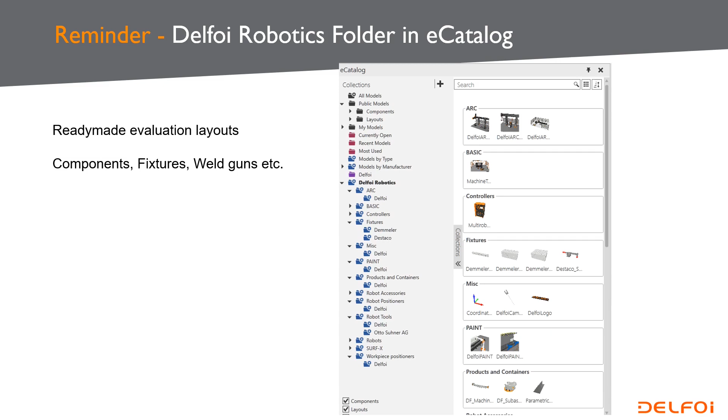Okay, but let's move on to Delfoi Robotics 4.5 release and its new features and functionalities. So first up is the localization feature, meaning that we now support languages that the Visual Components platform also supports. So it's English, French, German, Japanese, Korean, Spanish, Chinese and traditional Chinese. To change the language in the software, just go to File, Options and General, and then you can choose any language, restart the software, and the new language is set up.

Then the next new feature is a statement search functionality that allows you to search statements by name or description, but you will see a live video of how this really works. And then a new feature called undo redo. We have had lots of requests for this feature, and now we did it, and you can find it under the path setup panel. So there are undo and redo buttons over there, and basically you can undo and redo any action you take on the path setup panel, and you will see a live video of this in action.

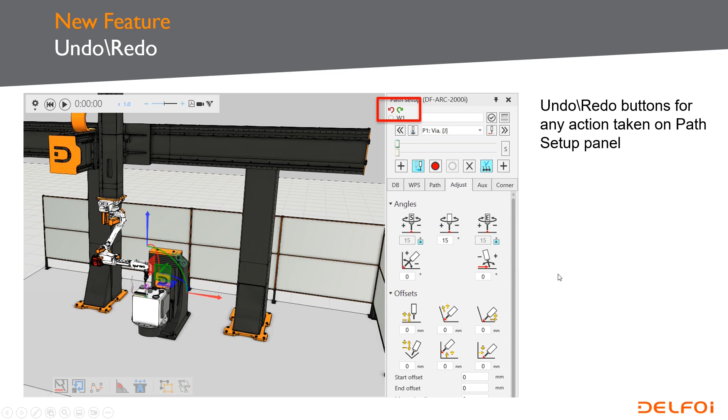Then a new feature, maybe the biggest feature in the 4.5 release, is called Program Validation Tool. You can find it from add-ons, Program Validation button, and basically it looks the same as the path check tool you have maybe previously used, but now this is a much more advanced tool. It allows you to check basically anything you would typically do with the simulation. So it's kind of a background simulation done really fast, and it can handle basically any scenario, any layout type, including multi-robot layouts. And you will see a live video about this one too.

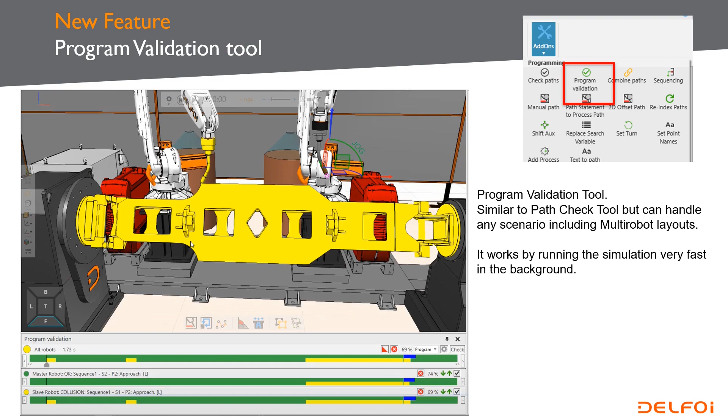Okay, so next up is my colleague Severi, who will show you live how those new features work. Hi all, Severi here. Now let's take a look at some of the new tools and features that we have added for the 4.5 release that will help you with your programming.

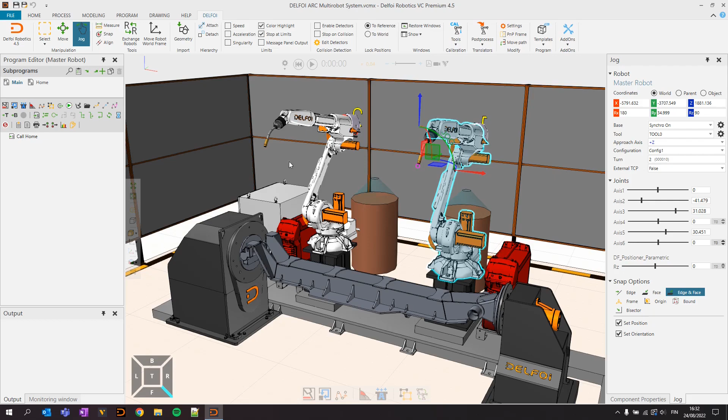Here we have a quite simple multi-robot layout where we have 2 welding robots and 1 workpiece positioner that act synchronously with the robots. The one on the right is the master and the one on the left is the slave robot. Now let's create a simple program for this and then see what our new tools will do in this situation. So first let's create a simple program for the master robot. Let's create a new sequence over here and start to do some welds on the workpiece. First, let's do a weld here on the bottom side of the workpiece. And for the start point, let's also do an auto search.

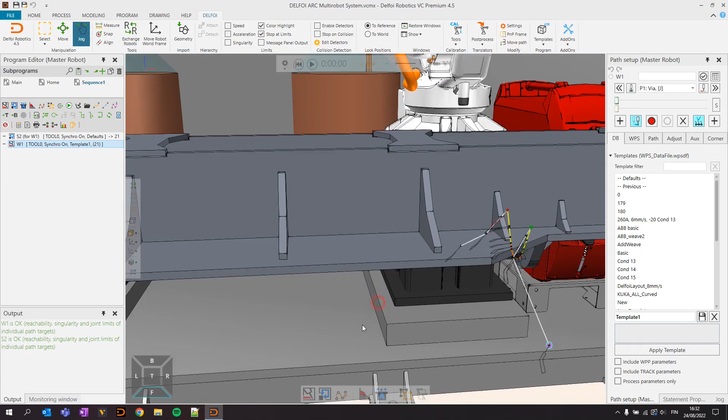Let's also do one weld here on the other side, somewhere over there, for example. And let's also do a start point search with auto search for that one. Okay, now we have 4 statements for our first robot, and the first feature I want to demonstrate to you is the ability now to search for statements inside the program editor.

So now these first 2 statements are here on the bottom side of the workpiece, so let's rename them both to be at the bottom. So we're just going to type in bottom at the name field of that statement, and then the next 2 we will write as top, so that they are at the top side of the workpiece, like this.

Now we also have this statement search panel available at the top side of the program editor. Here we can open up the statement search on the right hand side, and here if we type in bottom, we can look for all of the statements that have the name bottom over here. We can also search for top, which will find all of the ones that have the name, or we can also search according to the identifier, which in this case for the first weld is W1.

Note that it will also find the search that is now linked to weld 1 by the auto search automatically. So you can search for both of these statements automatically. You can also search for other statements. So for example, already in this layout we had a home point recorded. So if I write over here home, we can also see the home position easily, and also the program calls that call for the home program.

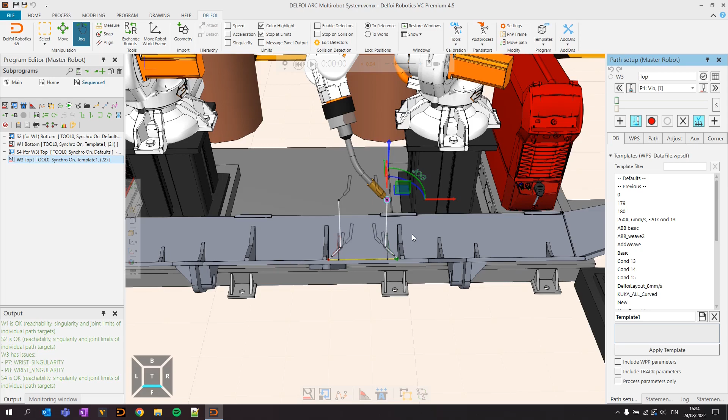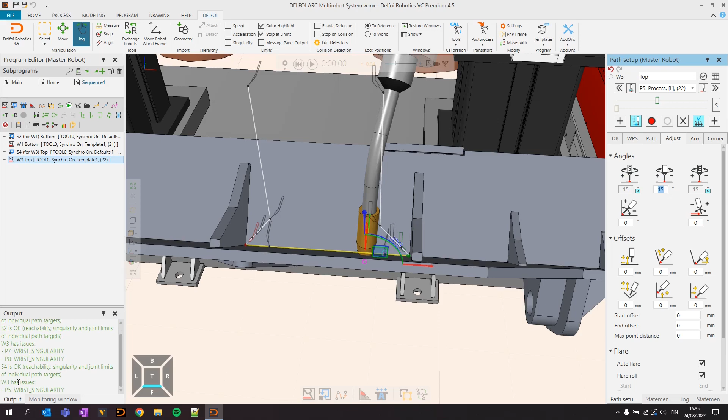The second new thing I want to highlight is that we now have the ability to do undo and redo actions when we modify these statements. So now, for example, if we go to a specific point in the weld and we do some changes, for example on the wire roll, now we can see that our statement has issues right after we have done some modifications. We have a singularity issue after we rotated it 15 degrees.

Now we can also see that on the top side of the path setup panel, the undo button is now available, so we can cancel the last action that we did, and clicking that, it will cancel the recent action that you have done for the path. After doing one undo, it now allows you to also do the redo action, so it reverses the last undo action. And as many of these changes as you do, you can then undo and redo them all if necessary.

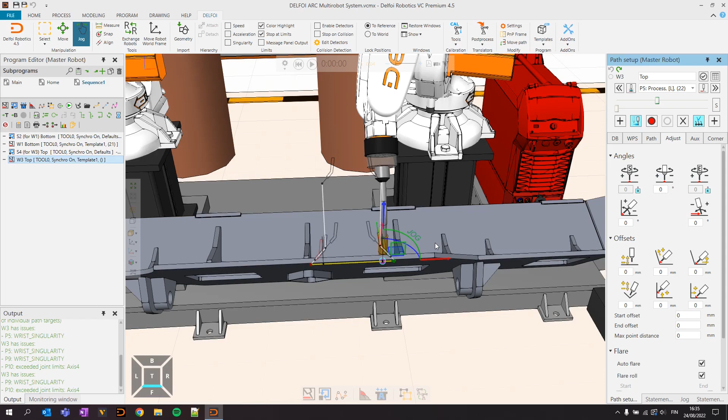So this will also help you with the management of your statements. If you do some irreversible change into your statement, you can now also undo it or redo it if you see that it was better. Now let's also take a look at the multi-robot programming.

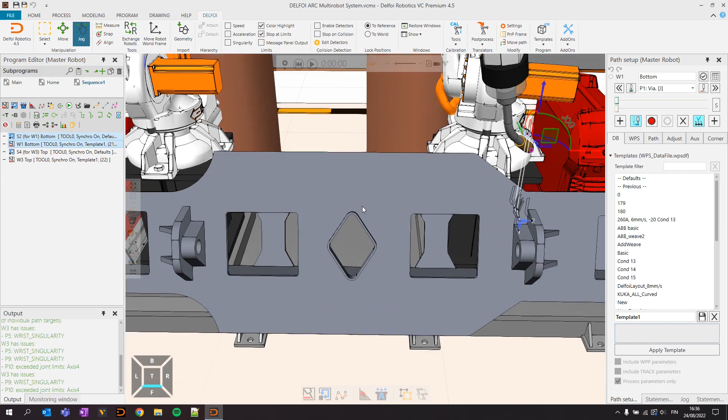So now let's go to the slave robot and utilize those statements that we did for the master. So let's also create a sequence 1 over here. Let's select the master robot and the first 2 statements. Now over here we will select the first 2 from this position, and we're going to use the clone tool to mirror those statements so we can put them here on the left hand side into the similar feature that we have for the slave robot.

Now we're going to also select the move path option. So we're going to select the target sequence to be the sequence 1 we just created. Component will be default, it is the same one where we created these. Target robot will now be the slave. Let's refresh that to sequence 1. And the base and tools, they will be at default.

So now we're going to apply. And now all of these same statements will end up for the slave robot in this position. Also, let's do this for the last two. Let's move this one out of the way for now.

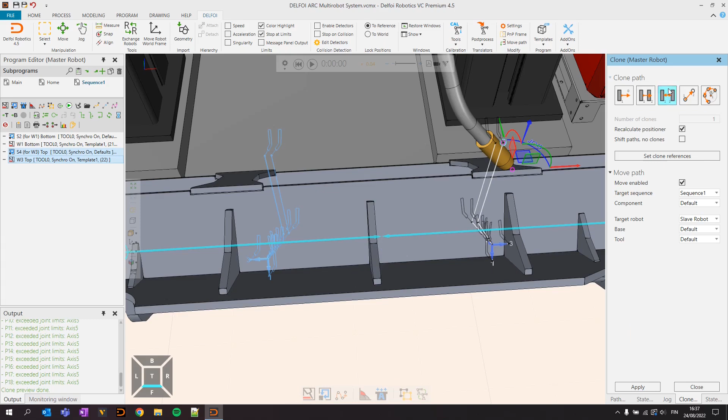Again, same settings, mirror clone, set the planes for the clone, see the preview that is okay. We're going to use the same options for the move and apply. And now also here on the slave robot we have the same program.

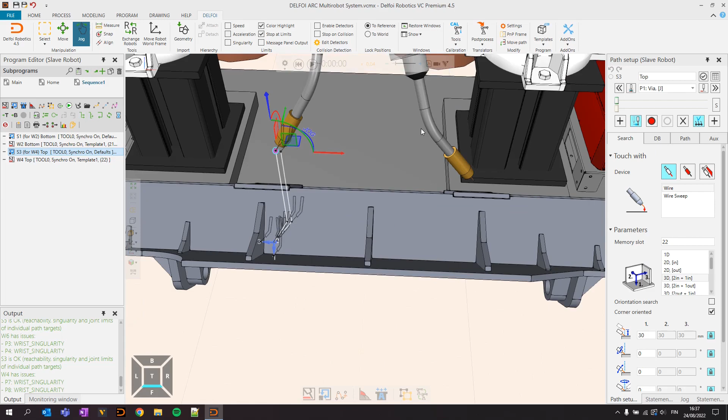Now the last thing for us to do is to get the statements synchronized between the robots. So we're going to go to our search statement, and to do that we need to go to the path tab and set the sync status for each of these statements. We're going to set for the master robot all statements the sync to be master. We're going to leave the positioner robot empty because our other robot, the slave robot, is now not a positioner, it is a welding robot. So we're going to keep this empty for now.

These options under the path tab are available if you have the multi-robot option in your license. And to create synchronous, fully synchronized movement like this in Delfoi, you would need the multi-robot license to make it work.

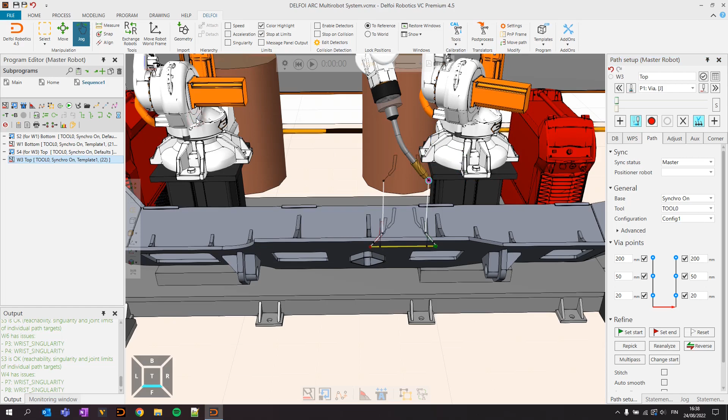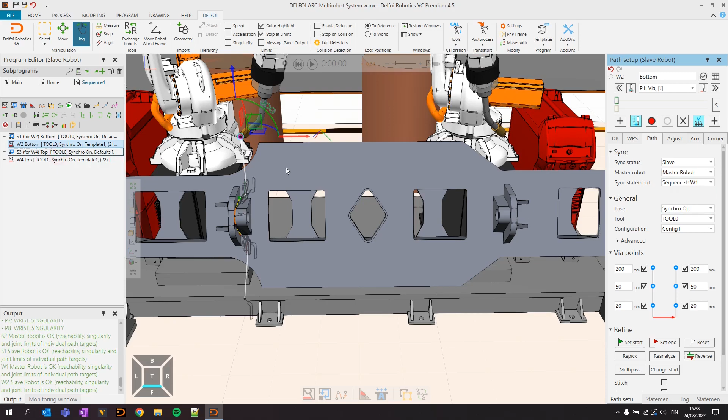Then for the slave, it is more or less the same. We're just going to select slave robot to be the sync status, master robot will be the master, and then we're going to select for the first search also from the master robot. Then we're going to continue this for all of these other statements also: slave, master, weld 1. Now for the second search is the same - we are slave, master is the master, and in this case it will show you an error if you choose wrongly. So we're going to select the second search in the master robot. There is basically no way you're going to do errors in this case.

Again to the path, finalize the settings, and now we have our program synced and created. So we're gonna call our sequence 1, both on the slave and on the master, like this.

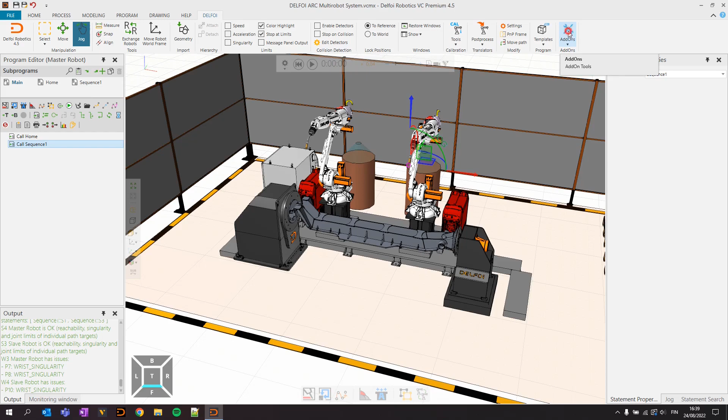And now we can show you the final new tool that we have added, which we can find here from the add-ons right next to check paths. It is the program validation. So the program validation tool will check now for the program that we have created for all of the robots and all of the components involved.

Like with path check, we can also check for the entire program, just one sequence, or selected statements. And then of course we can select whether we want to check for joint limits, singularities and or collisions. And also now we have the option to select a maximum iteration step for the TCP while we run our program in the background. All the other options are the same as with the path check panel.

Now we're going to check our entire program, so we're going to click on check, and what this will do is run the program in the background according to the TCP iteration step that we have allowed, and then it will check the entire program for collisions, reachability, singularities and so on. And after we have checked the entire program, we can then see the results in our program validation window like this.

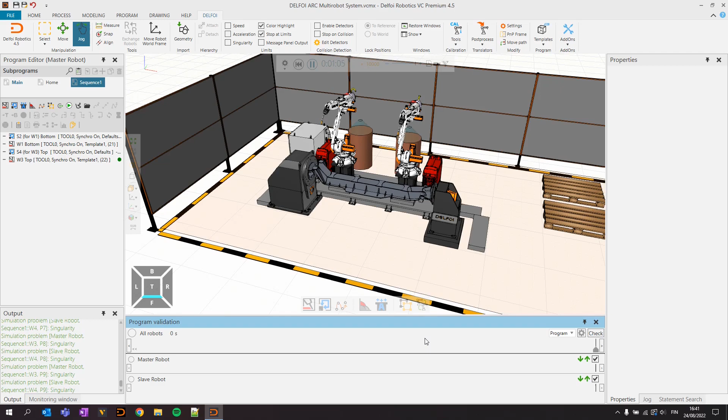Now over here we can see where the problems happen. So as with path check, the green color indicates that everything is okay. On the top in all robots you can see the slider, which will then interpolate the program step by step, showing you the time where the problems happen. And like previously, you can click on the color where you can go to the first problem point.

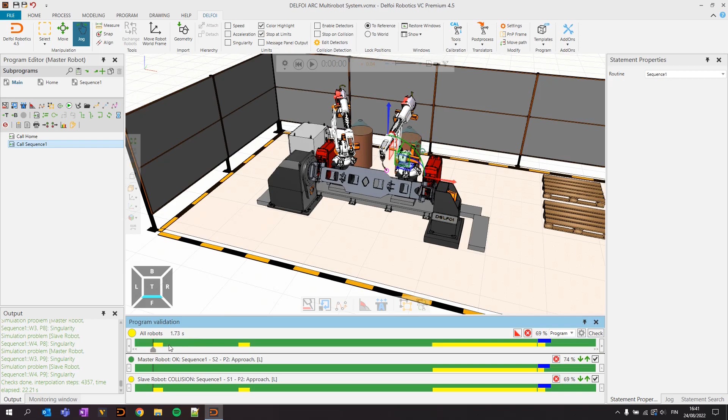So here we have a collision right over there with the slave robot and the workpiece. And now we can see also indicated here on the master robot side that the master robot program is okay so far. So now the approach movement for the slave robot would need some fixes, and like previously, when we go here into the problem point and we click on the statement where we have this collision, it will bring us right to the correct path setup panel of that respective statement.

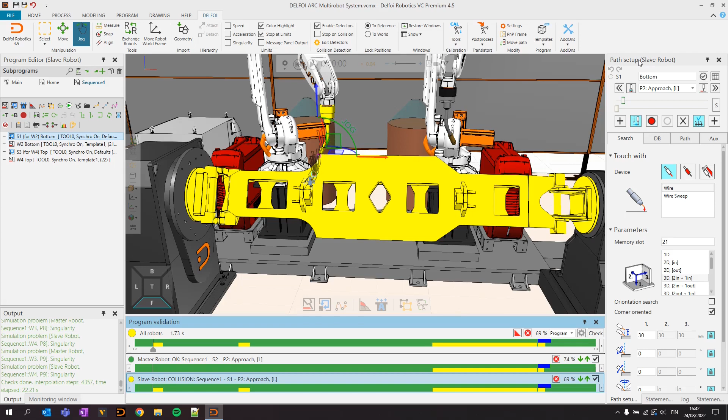Then we can also go forward to see how the program looks and how it interpolates, and we can also see the full synchronized movement of all of the components that are taking part in the simulation.

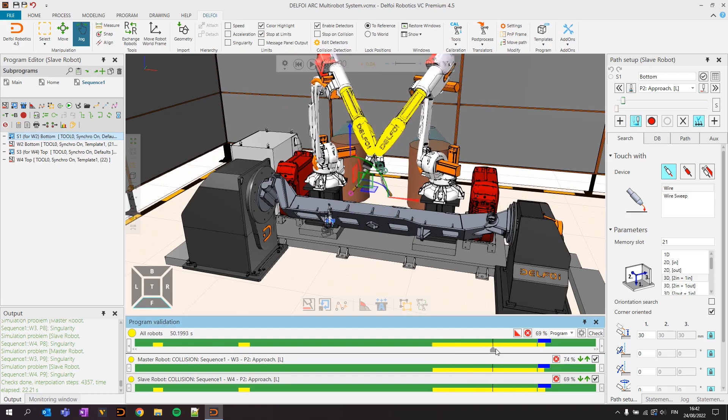And there we can also see highlighted what are the problems we might have. So we have a collision now between the robots, and at the end we also have some issues with singularities when we approach the endpoints of these welds.

Now after checking this path, we can be sure that this robot program is something that we cannot translate to the actual robot controller. There are quite a lot of issues that we need to fix, but this is a clear demonstration of what you can do with the program validation tool, and how you can easily check what is actually happening with multiple robots in our layout, how to check for those issues, and how to fix them also.

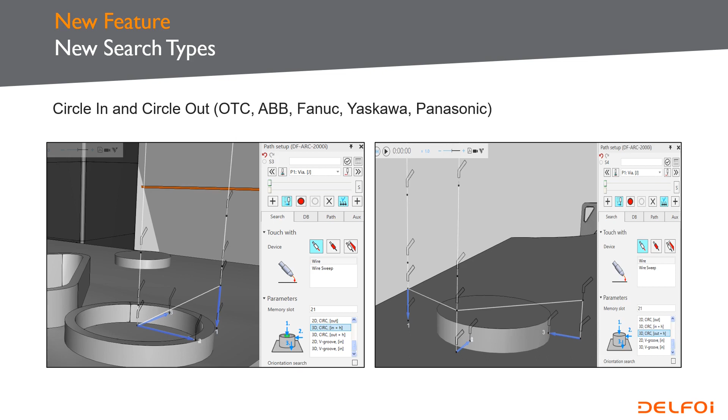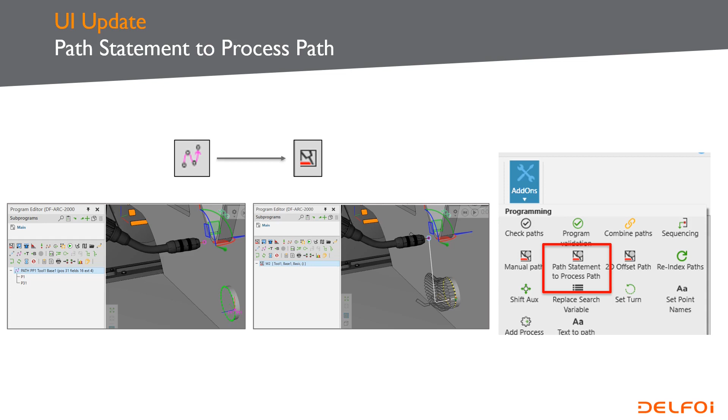And then we have a small user interface update to make it easier to control how the path statement from Visual Components can be converted to Delfoi process path. You will also see a live video about how this new user interface works.

Then an exciting new feature: a 2D DXF drawing imported to Delfoi and converted to a Delfoi process path, called DXF to path. You can find it now in the 4.5 release from templates, the DXF to path button over there.

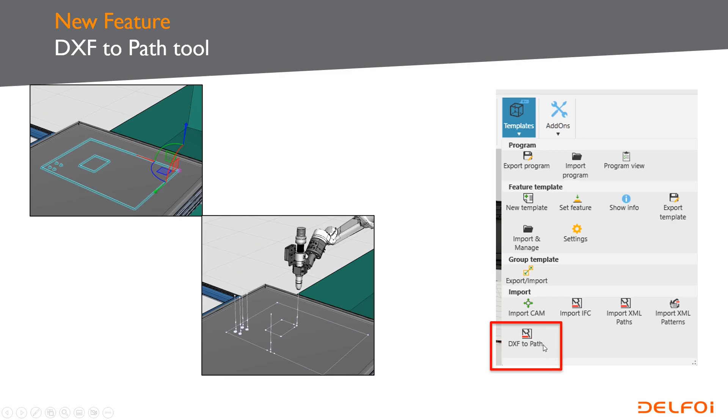And next up is my colleague Vidisha, who will show you live how these new features work.

Hello all, Vidisha here. Let's now have a look at another set of tools for the 4.5 release. We now support circular searches for ABB, Yaskawa, Fanuc, OTC and Panasonic robot brands, and we will have a look in this layout at how to generate those circular searches.

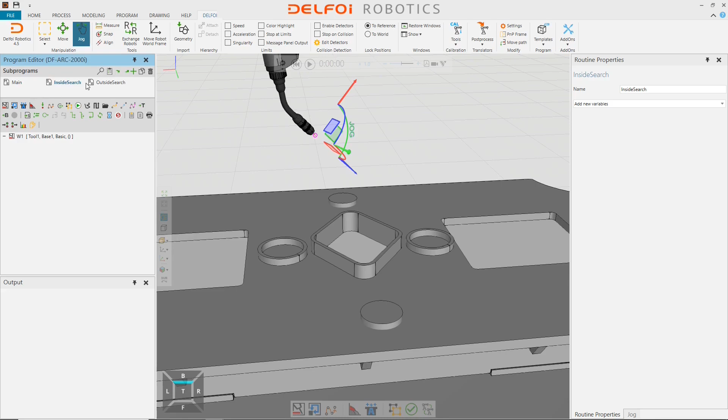I have already created two separate subroutines for inside search and outside search. In this inside search, there is this circular seam already generated using the create path tool. Now we will move ahead and use the create search tool.

After this, we go to the search mode and choose the 3D circ, or 3D circular inside search, option. When I click on that, you will also see a preview of how you need to pick the touch points on the CAD file. You can also see the notifications inside the output tab.

So let's go closer and pick the first search surface as the inside of the circle, then pick the outside surface, and then the third surface would be the top surface where the seam is located here. Once you do that, you will see that this robot motion to calculate the circular searches is now generated.

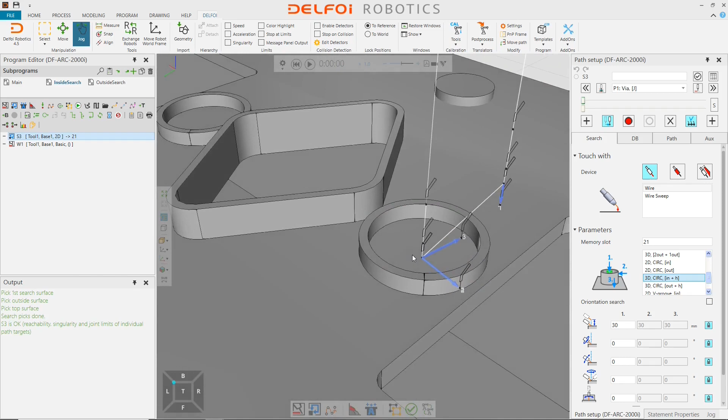This has a little bit different way of tweaking these points that you have generated. For instance, in this case, you would like to have these points touching a little bit on the top surface of this circle, and in order to do that you have this drive distance.

So you can use this first block from here, the drive distance block, and when I change the length from here, you can see that the position on the vertical surface where these touch points are, I'm able to change that. Secondly, you can also change these point locations radially using the twist angle. When I change these parameters in the first block over here, you are able to change the locations of these points radially.

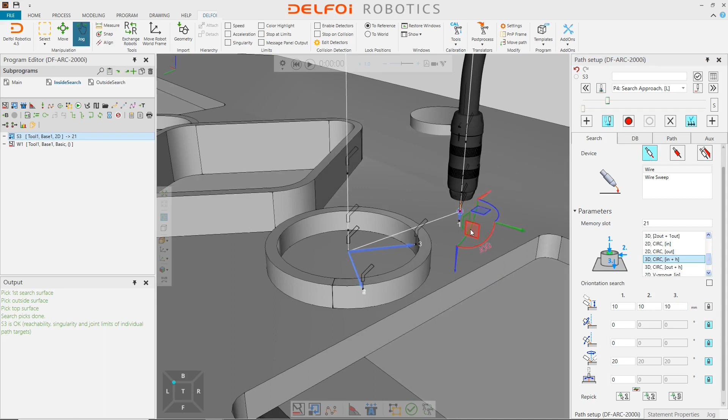Another important thing is for this first touch point, for this height, you can tweak that point using the third column over here. So if I uncheck this point, or uncheck the lock option, then I'm able to control the drive distance. Similarly, I'm able to control all of these other parameters from here using the third column.

Next, you have some advanced parameters. These are specific to every robot brand, and based on the robot brand, these values will change. So in this case, you have the height, first, and variant options. And when you make a change to this option, let's change the variant to 3.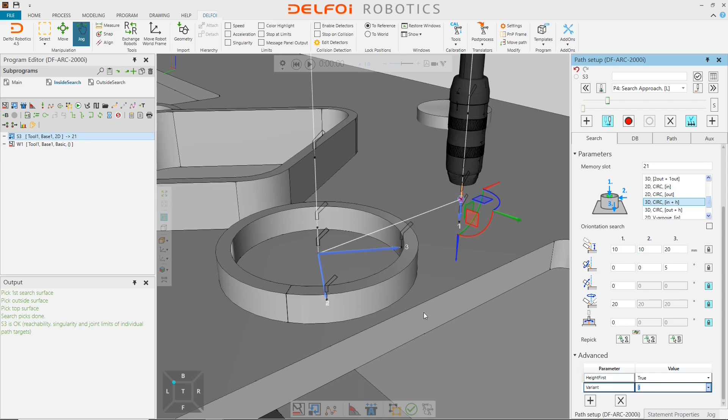I will not be able to see the changes automatically, so in order to see what happens when you change this to variant 3, you might need to tweak something over here first. And you notice here that we now have a 4th touch location generated based on this variant.

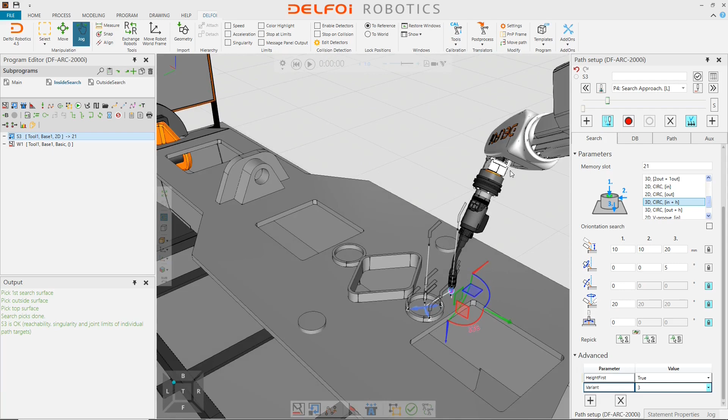Now, depending here, we just have a Delfoi robot model, but based on the robot brand that you're going to choose when creating the search paths, you will see differences in the search points that are generated when you change the variants in your layout.

In the same way, we can also generate the outside search. Here I have the outside search generated. Let's click on the create search tool, and from the path setup tab, from the search mode, we will select the 3D circular outside search. Again, it shows the preview of how the search point should be picked up.

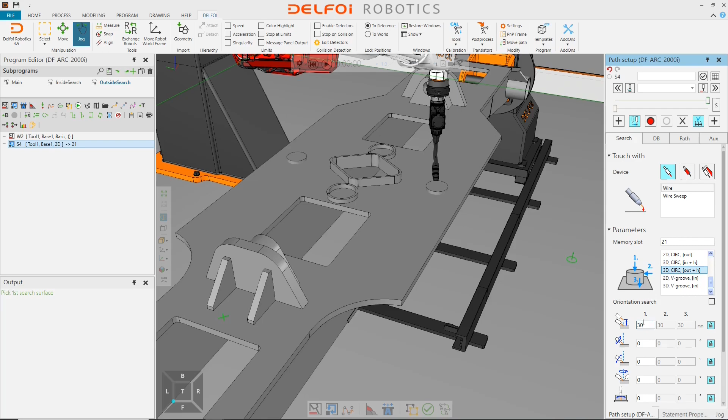I'll make some changes to the drive distance. Let's pick the first search surface, then the outside surface, and then the top surface. Once you do this, you have the search points for the search locations now generated.

You can then change the radial location using the twist angle. Also, if it happens that when the robot is moving from the second touch location to the third touch location it collides with the workpiece, you can use the second row over here, which will increase the wire distance along with the drive distance for the second and third touch points.

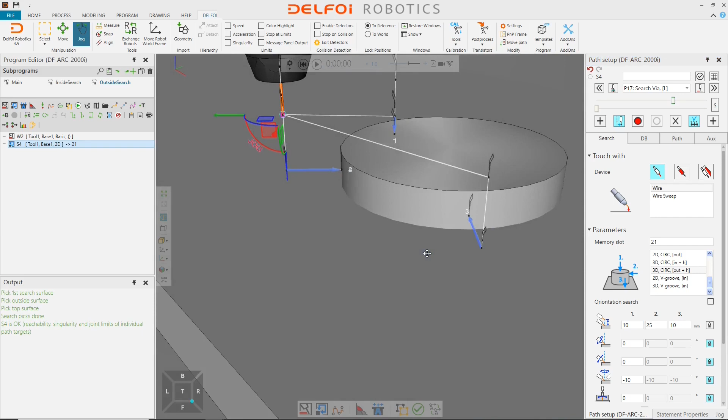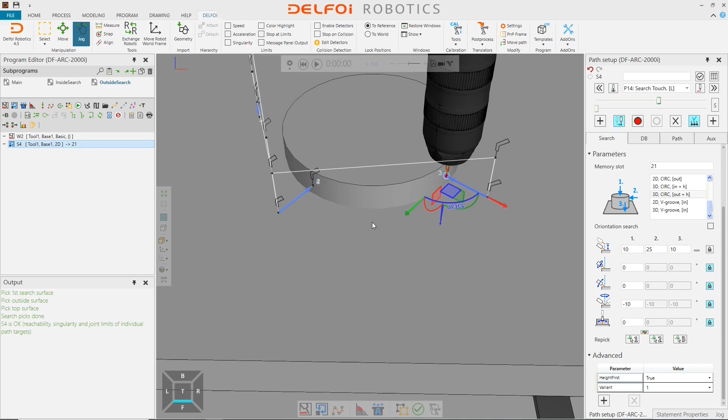Also, with this you have the advanced options for height first and variant. We did not see the height first option in the inside search, so let's check what it does. If I change this height first value to false, we need to make some changes to the UI so that the change of this height first is visible.

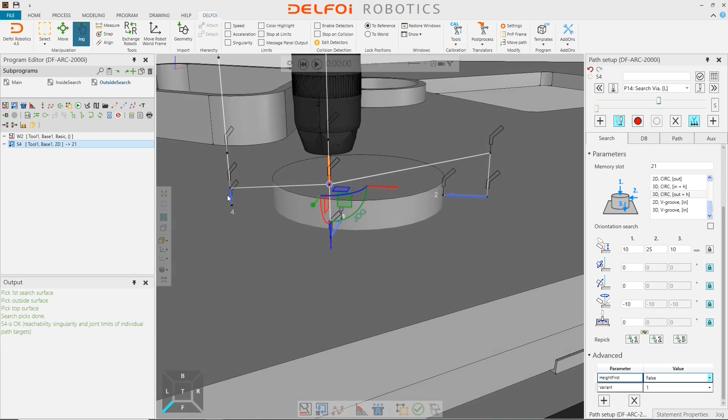Now I will again change this wire angle a little bit, and let's make it 0. Notice that this height option has now changed to 4th, so the height detection is then done as the last point for the search. That is basically the difference.

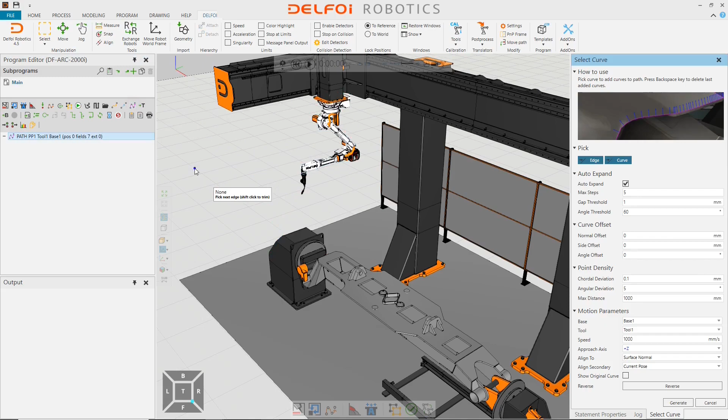Let's have a look at the path statement to process path tool. You can find this tool from add-ons over here. Note that this is only applicable to users having the professional or premium version of the software. The usage of this tool could be for cutting applications, so in case you have a surface model with low thickness, it would be better to use the path statement tool from here.

One issue with the path statement tool is, let's see, we have generated the path, but you're not able to control all of these points together. You're not able to tweak them easily, and also not able to add process specific parameters to them. To do that, you can use this tool from the add-ons, and you also have some options here in the UI to control the point generation.

Once you click on the convert option, you see that this path statement has now been converted to a process path statement, and then you are free to use the path setup tab over here and all the options from it. You can also easily control the gantry so the points are reachable, tweak the points however needed, and add the process specific parameters from here.

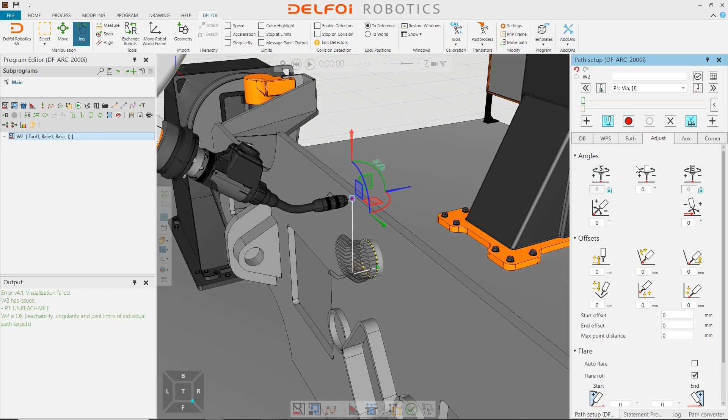Let's have a look at the DXF to path tool. This tool can mainly be used for cutting applications. For example, if you have defined the process points for a cutting operation in a 2D file, you can import that 2D file so that the tool will automatically generate the robot motion points for you. Let's have a look at how to do it.

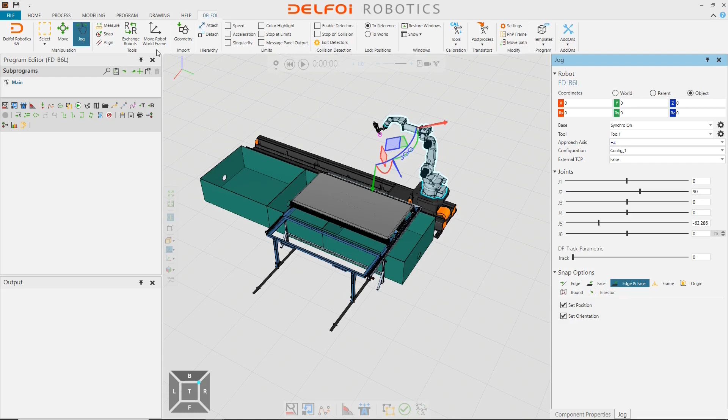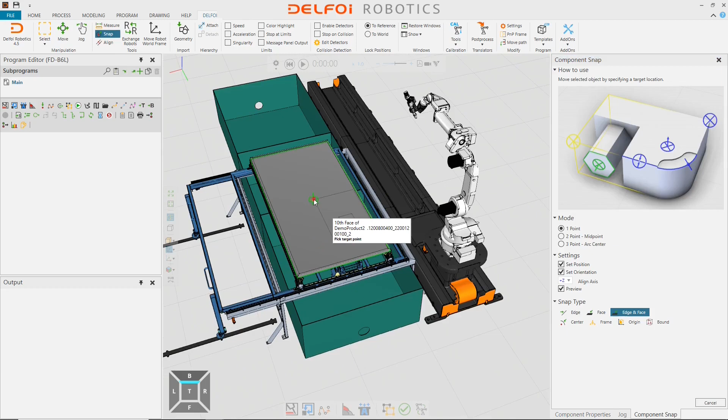First, we will use the import geometry tool to get the 2D file. Select the 2D file and open it in the software. We will then, using the move tool, snap this 2D file correctly onto the CAD geometry. Once you have it positioned over here, you can use from the templates the DXF to path converter tool.

In this UI, you have some options to control the distance and angle sensitivity for the circular points. You also have the option to remove the longest path. This means that if you have defined the outer boundary of the path inside the 2D file just for reference, so that you're able to easily place the 2D file on top of the CAD geometry, then you can remove that outer boundary of the path where you do not want to perform the cutting operation, using the remove longest path option.

Also, you have the auto split routine size. For instance, in this case, after 200 points, the software will automatically create another subroutine for the process paths. This is just to help you control the points inside a certain subroutine. Now, if we go ahead and click on the convert option, this is going to convert the paths.

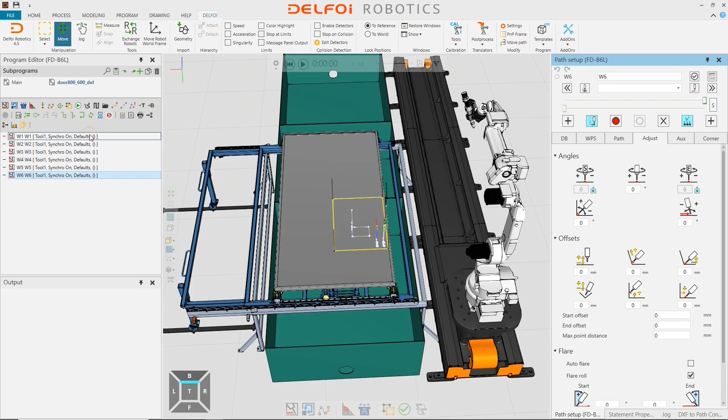So here you can see we have all of these cutting operation paths generated, and then you can use the path setup tab to tweak these points however required.

And the next functionality is basically a functionality update of conveyor sync. We had it already released in previous versions, but now we have modified quite a bit how it works, and we will show you a live video of how to operate with it.

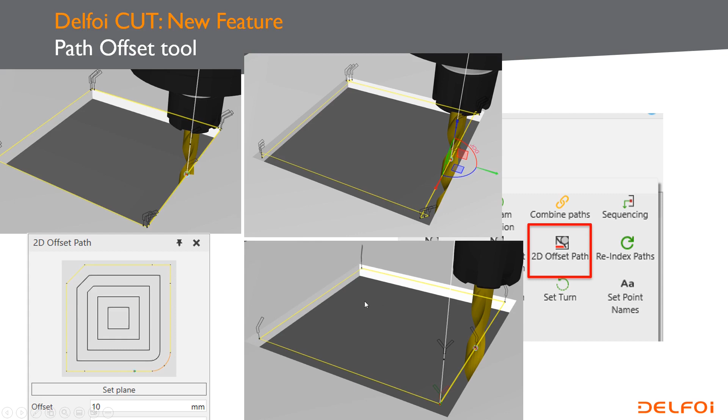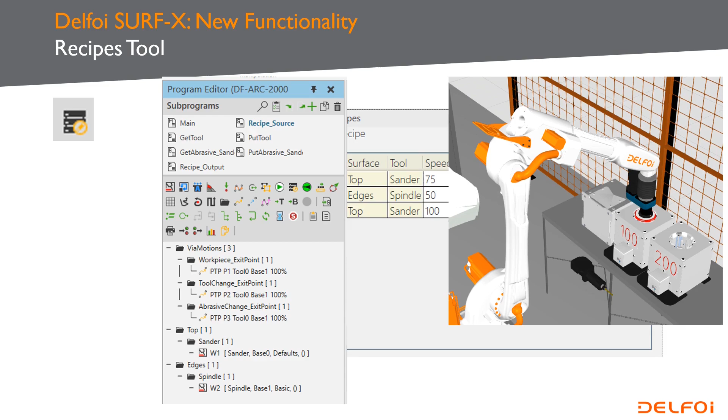And then a new functionality for Delfoi SURF-X product called Recipes tool. It's a little bit hard to explain in a few words how it works, and you will also see a live video about this. But basically, it enables the operator to create a recipe for how to get from a rough surface to a finished surface, for example a polished surface, by repeating the same surface paths but just changing the abrasive used on the tool.

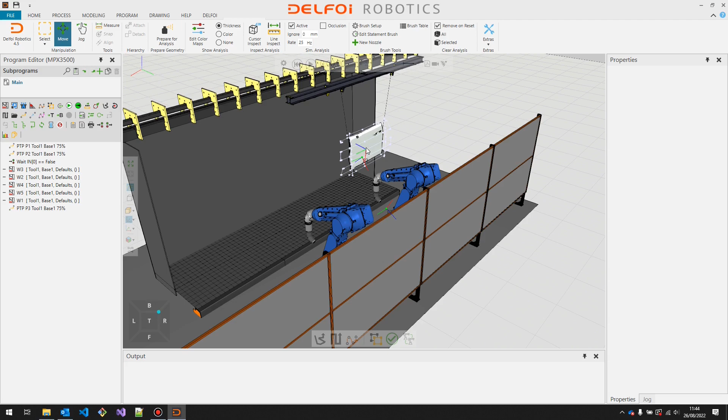So next my colleague Tommy will take control and show you how all these new functionalities work live. With Delfoi Paint, it's now possible to synchronize robot motion and conveyor motion together. In this layout, we have two robots painting a door that's moving on a conveyor. It's missing the conveyor synchronization, but we will be adding it now. Just to show the movement, I press play, and we can see that the door moves and the robots just wait.

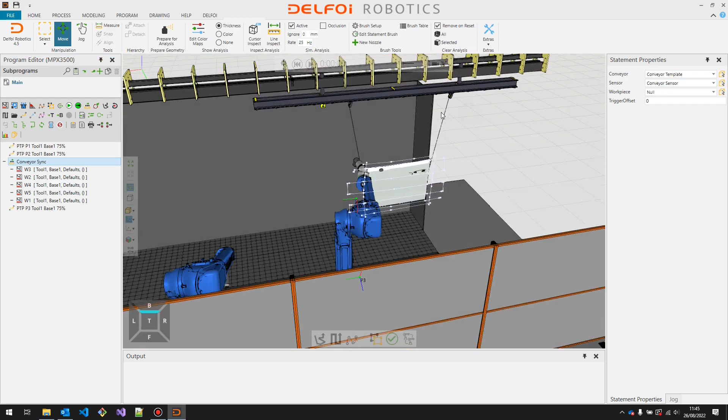Now that we want to have the robot and the conveyor synchronized together, we create this conveyor sync statement. You can see that it's able to take in other statements. We have these paths already made, and I will move these all under the conveyor sync. Now it will need some parameters before it works. First of all, it needs the conveyor and then the sensor, which in this case is here. This is the sensor that will trigger the execution of the conveyor synchronization statement.

And we have to select the workpiece. I will select the door. Then we can set the trigger offset. In this case, I will leave it at 0. And now, if I execute the program, it will actually wait for the trigger, and then it starts to execute the statements inside.

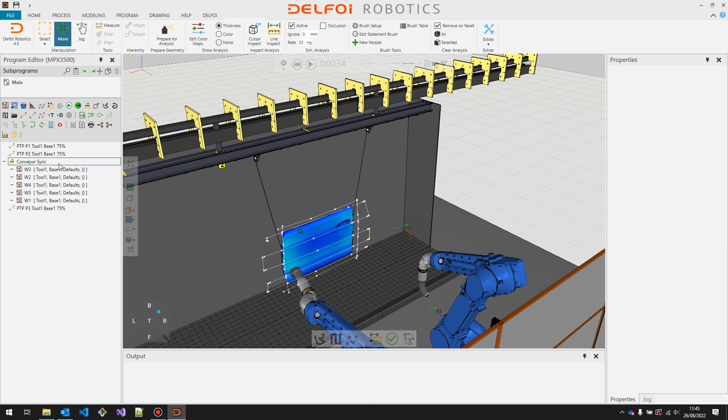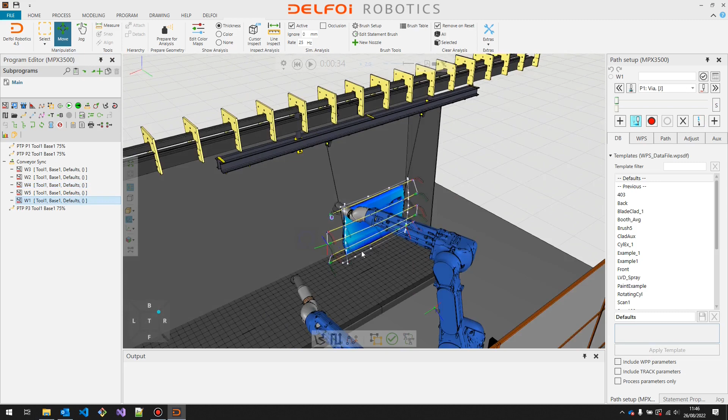I will pause here, and now if I select the conveyor sync statement, it remembers where everything was when it started the execution. And if I select any statement inside, it will again jump to that position. So now it's much easier to make modifications when we know where the workpiece was and where the robot was. Let's edit the second robot as well. It will also need a conveyor sync statement. I will move the only path here under the conveyor sync.

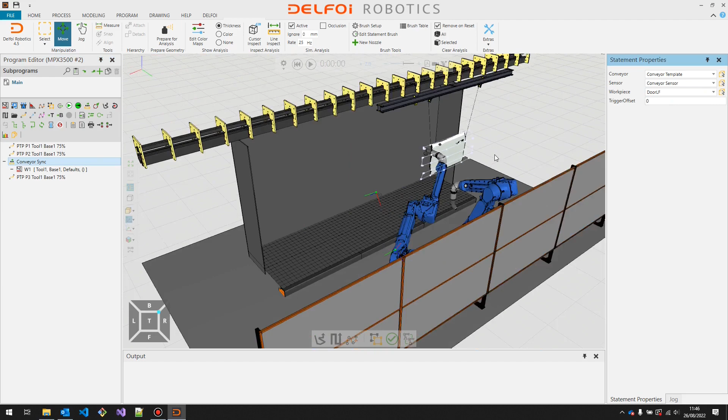And again, I will put in the details here. But now we have to edit the trigger offset, because as you see, if it were to attempt to paint here, it would not be able to reach everything, and also it would collide with the first robot. To fix that, I will increase the trigger offset.

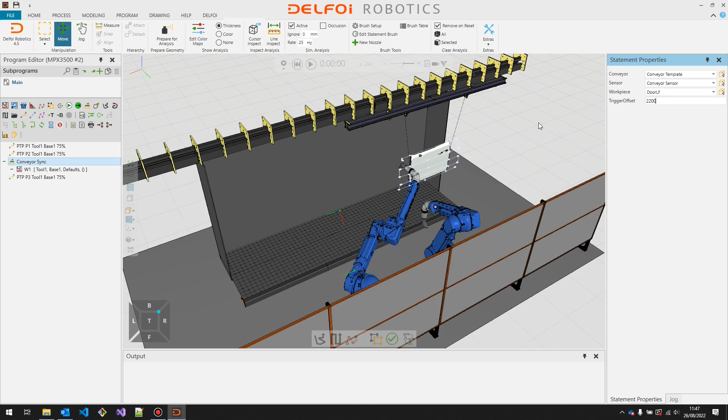I will make it a bit over 2 meters, and now the conveyor sync will actually wait for the trigger and this trigger offset distance before it starts to execute. You can see from simulation that the trigger is now triggered and the first robot starts to execute immediately. But the second one will actually wait for the 2 meters to pass before it starts to do anything. Like so.

And now we have simulated this. We could also post-process this and then upload to a robot, and it will then do the same synchronization. So it will wait for the workpiece to arrive and wait for the trigger. And then if you set the trigger distance, it will also wait for that distance to pass before it starts to execute.

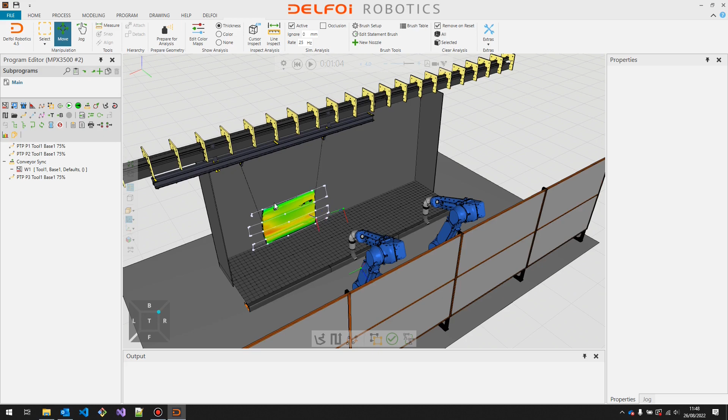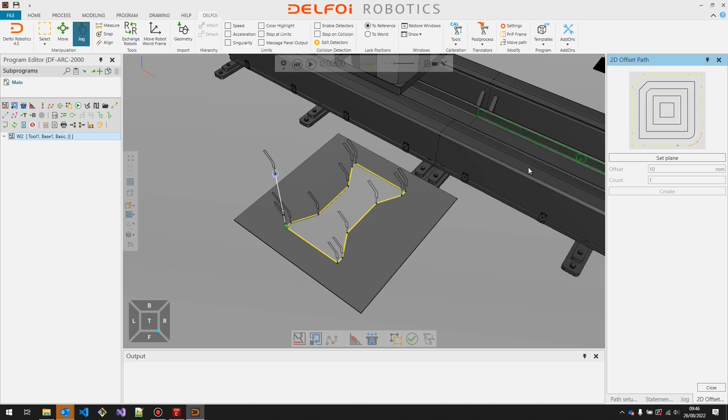2D offset path is a new tool that can be used to offset an existing path. In this case, we have a cutout and then a path around it. To apply an offset to it, I will select the path and then go to add-ons and use the 2D offset path button. It will open a new panel, and you will have to first select a plane. This is the plane that the offset is done in.

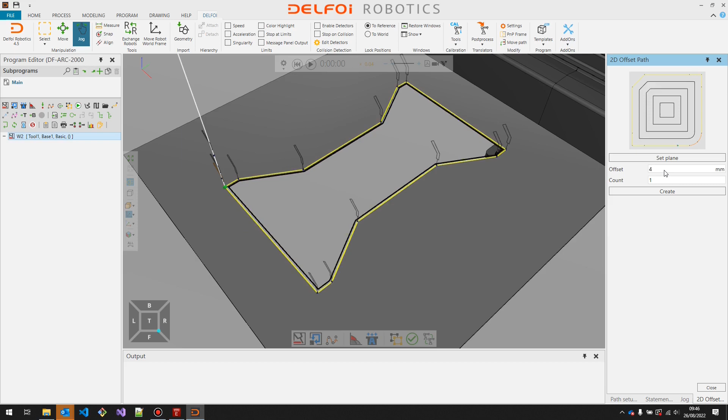And now that I have a plane, we can see a preview of the offset. So it's 4 millimeters from the original path. I can change the offset, increase it, and I can actually flip it to the other side as well to expand this. And if I shrink it enough, it will make it smaller and smaller until it disappears. And you can see that in this case, before it completely disappears, we will get this scenario with two different islands, and they will be created as separate paths as well.

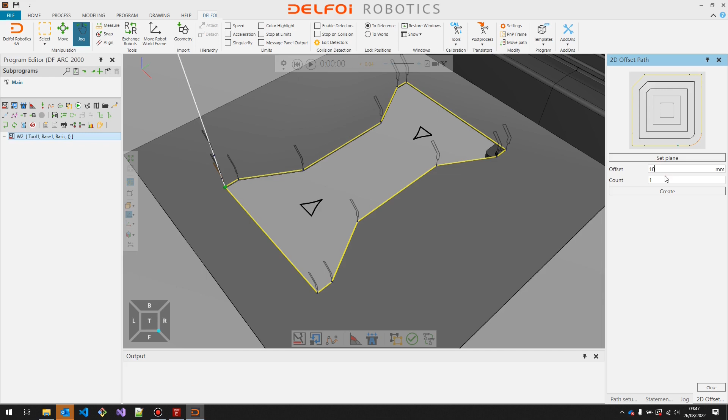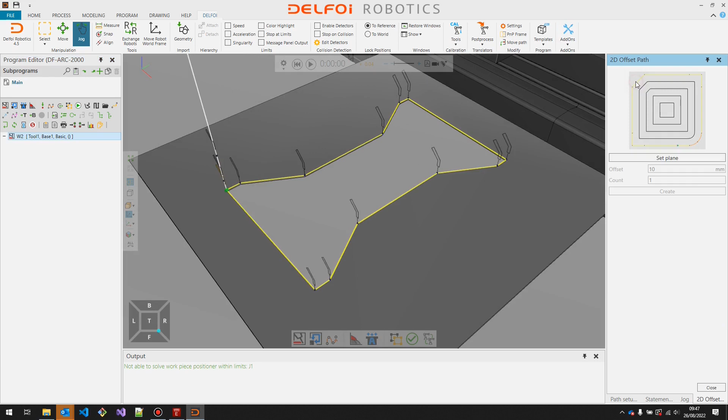Let's create a 10 millimeter offset and create. And now this is the path that we got. If you want to repeat this offset multiple times, it can be done in the same tool as well. So I will delete this and use the base path, and then apply the offset again. But in this case, I will increase the count. And now I create. And we get 10 millimeter offsets repeated. And you can see at the end, there are the islands as separate paths.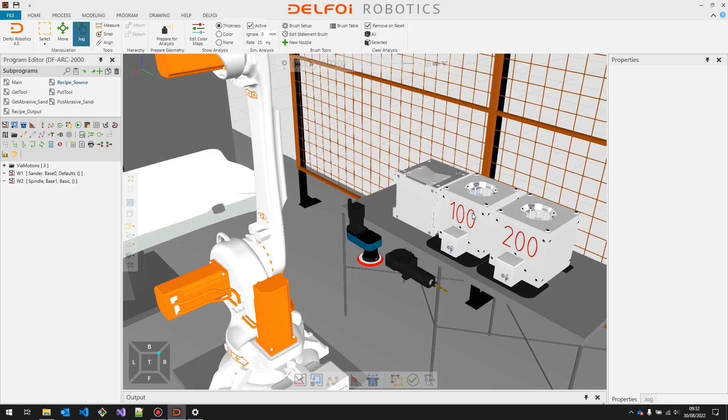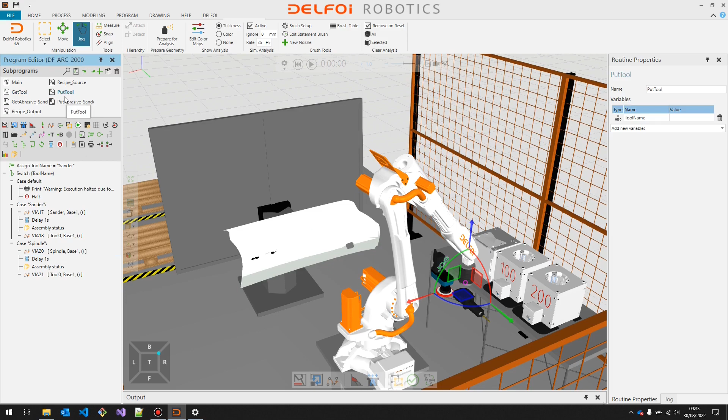Delfoi Surf-X recipes can be used to manage complex programs involving multiple tool changes and also abrasive changes. In this case, we have two tools. There's a sander tool and a spindle, and then we have two options for the abrasive for the sander. In the program editor, we have get tool, which contains all the necessary motions to get either of those tools, so either the sander or the spindle, and also put tool to put them away, and then get abrasive to get an abrasive for the sander, and also putting away the abrasive.

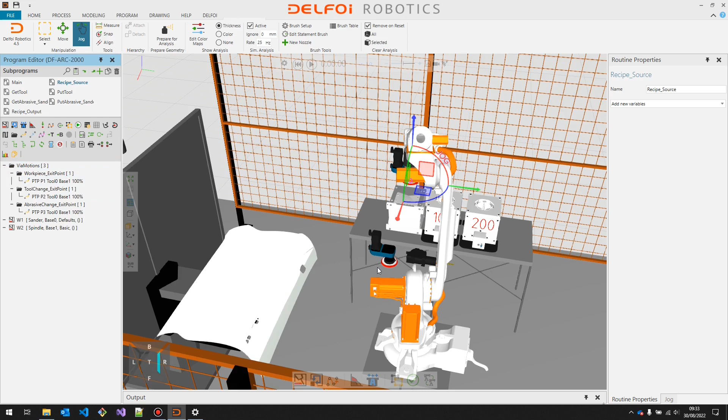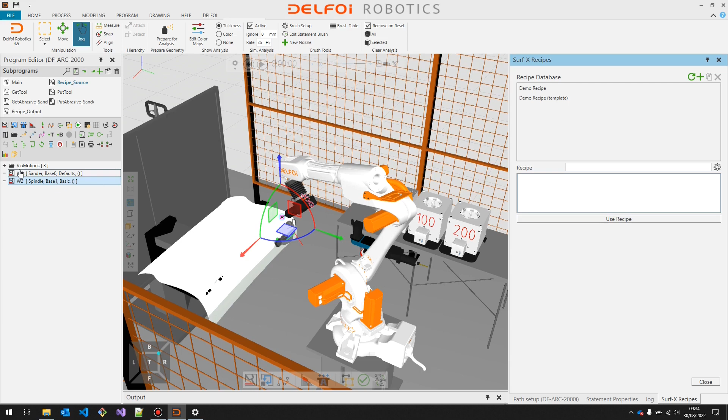And then we have recipe source, which contains some via motions, how to get from one station to another. And I have already made a couple of processing paths, one for the sander and one for the spindle. And now the recipes, which can be found in the program editor, are used to generate the program for a cell that already has this setup done. So the robot has to know how to get any tool or get an abrasive, and then how to move between those stations through via motions shown here. So just a single point to move between stations.

And then when we open a recipe, we can generate a program from it. In this case, I have a two-step recipe, and each row is a single step. One row defines a surface that's being targeted and the tool that is being used, and then some optional parameters. In this case, the sander will have abrasive 100, pressure 300 and speed 75. And then the next step in the processing is targeting edges with the spindle and speed 50.

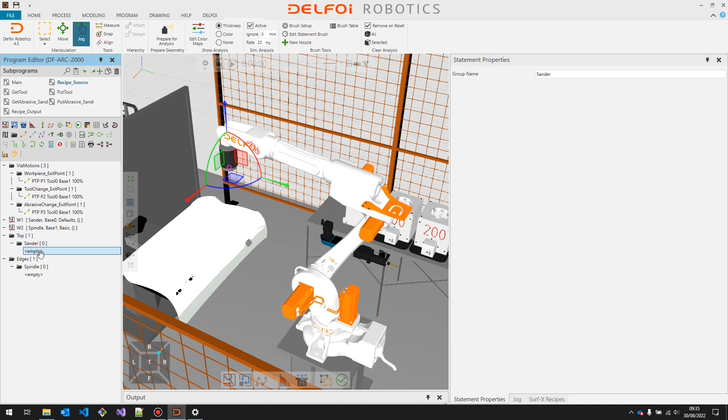And now if I press create source routine, it will update this recipe source routine. And you can see that we now have folders which are empty, but essentially they tell us where to put our processing paths. So you can read at the top, and the sander path should be here. I will drag and drop my sander path under there. And then for the spindle, I will put it in the next.

In this case, we have one path for each. We could have multiple paths for the same tool. This will demonstrate well the principle. And then when we are done with that, I can press generate, and it will create a program, and the program will be in the recipe output.

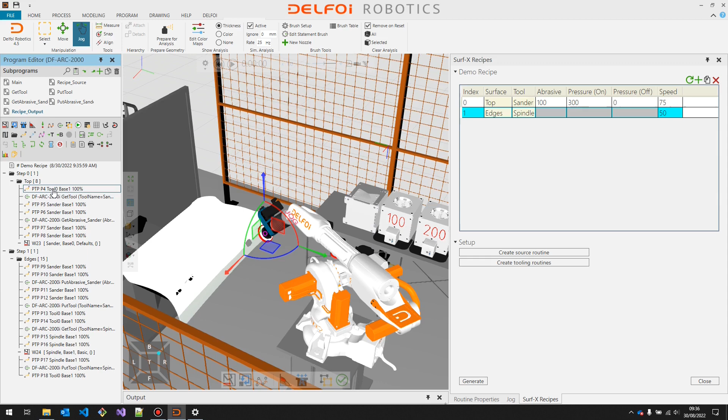Now this will contain steps based on the recipe. So there's 2 steps, and you can see that we also have 2 steps in the program, and under each step we have all the necessary tool changes and abrasive changes in a correct order to achieve this processing recipe.

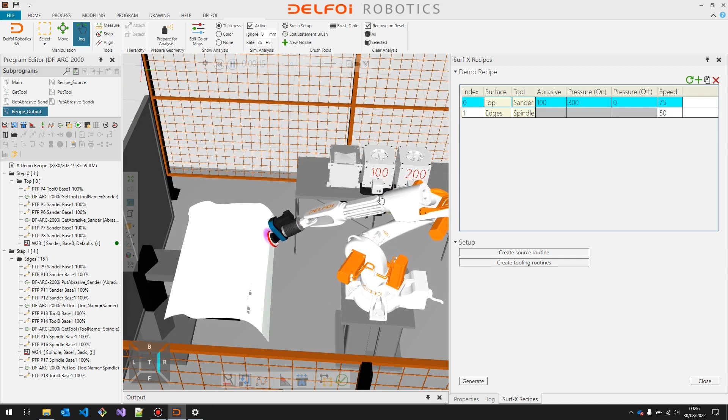Now let's play this. We can see that it goes to fetch the sander first, and then for the sander it will get the abrasive 100. And then it will put away this paper, and then it will replace the tool with the spindle because it's the next one in the processing steps.

And now we essentially only have to create the setup for getting tools and putting them away once, and then when we create those processing paths, we can use a recipe to tell the robot when to change tools. And now I can change the recipe. I can increase or make more steps.

I duplicate the first one, and let's change the abrasive to a bit finer grit, and maybe change the pressure as well. And then I can reorder everything. Let's make the edges happen first, and then change the order of the sanding such that the order is now first edges with the spindle, then sander abrasive 100, and then sander abrasive 200.

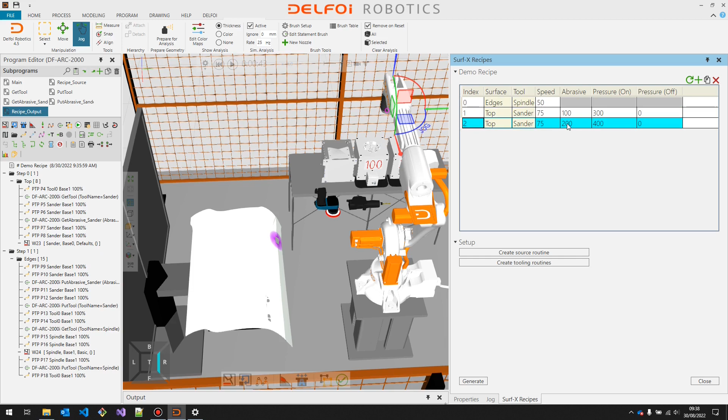Generate. And now it will replace the existing program with the new one. And let's play. And we can see that the robot now takes the spindle first, and then goes after that to get the sander. And it will get the paper 100. And then it will change only the paper to 200, and then it will repeat the processing.

So the recipes will make it possible to easily change the processing steps, and then just generate the program, and then the recipe generator will automatically handle the tool changes and abrasive changes in correct order. So you don't have to manually make those happen at the right times.

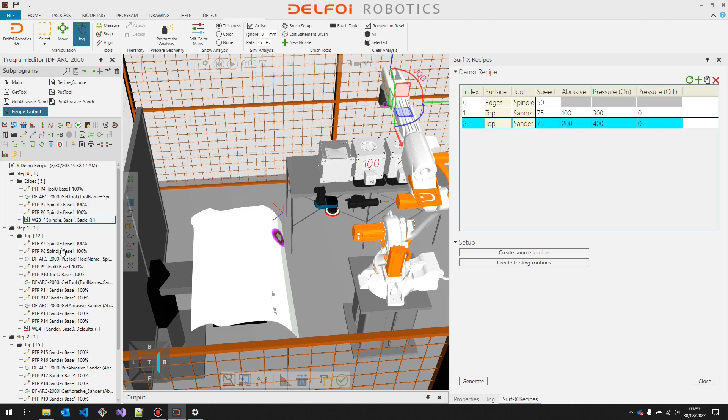And then let's take an example, one of the sander paths. And in the recipe, we can see that the first sander path uses pressure 300 and speed 75. And now let's look at the VPS tab for that path. We can see that it has 75 millimeters per second, and then also the pressure is set as a process parameter based on the recipe.

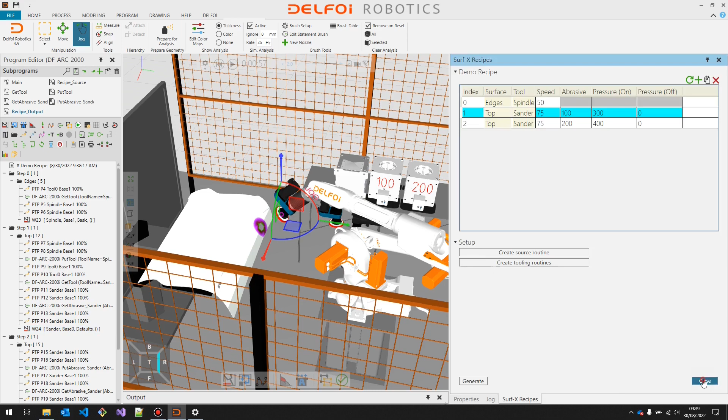And of course, you can then save the recipe and use it for a different workpiece. You just have to create the processing paths, but as long as the setup is done, you can just press generate, and it will do all the tool changes for you.

Okay, so then we have a couple more new things that have been added to the 4.5 release. First up is that we now have 2 more post processors, for Siasun and for Comau robot brands. Now in the partner release there are only downloaders, but we will also add basic uploaders to the commercial release, meaning that you can do calibrations and upload the calibration points, and maybe later we can improve the uploaders if needed.

So then we have a new feature called Change Start, and basically it's a tool for paths that are fully continuous around some shape. So it's not only for full circles but full loops. And if you're not happy with where the start point is calculated by Delfoi software, you can take basically any point from the path and with Change Start jump the start point and end point to this location, and then it's basically rotating the path so that it works as you want.

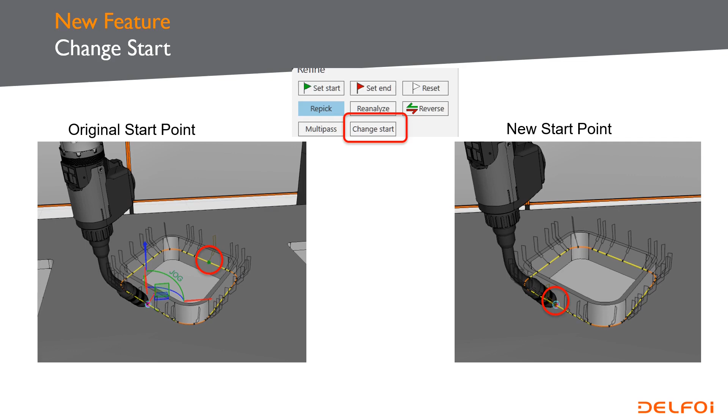And then we also added turn joint for joint 1 of the robot arm. So now you can control whether you want to force joint 1 to be calculated over 180 degrees or less than minus 180 degrees. To trigger it, go to point control, and then you can control it in the column called turn J1.